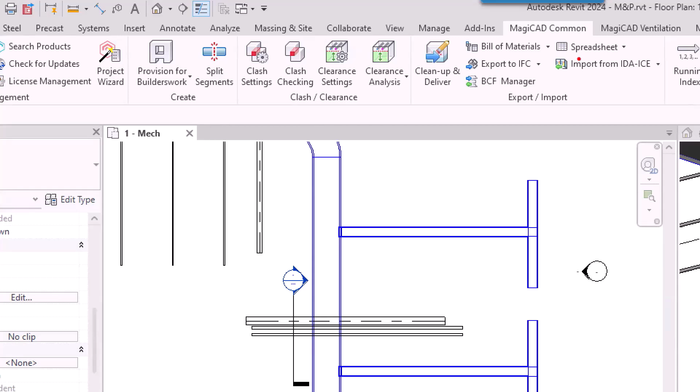Here you can find this kind of function from MagiCAD Common. You can find a lot of useful functions here, like provision for builderswork, clash checking, clearance analysis, and some kind of spreadsheet. A lot of useful functions here.

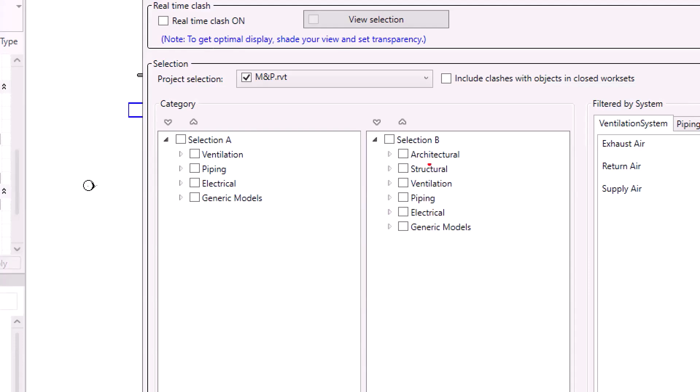For this function, I will go through clash setting, and I want to check clashes between different disciplines. On the left side is for the MEP disciplines, and on the right side is for MEP and architecture, structure, all disciplines. So I want to check clashes between ventilation, piping, and also between ventilation, piping, and electrical.

I want to make clashes, I want to check clashes between them. And here you can find we also support clashes between the current model and the linked model.

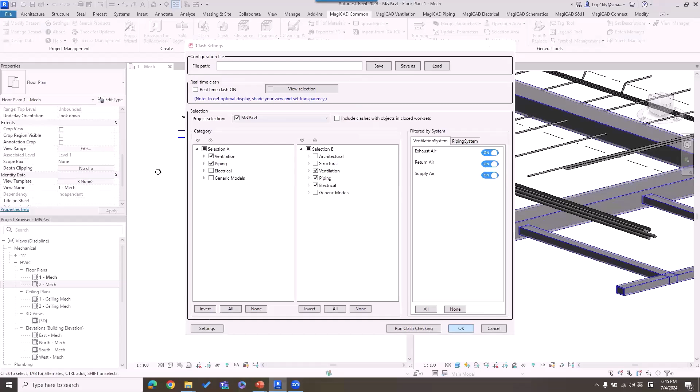Here I can do clash checking for the current view, to check clashes and get a report. With this report, you can do like this: check the 3D view for each clash.

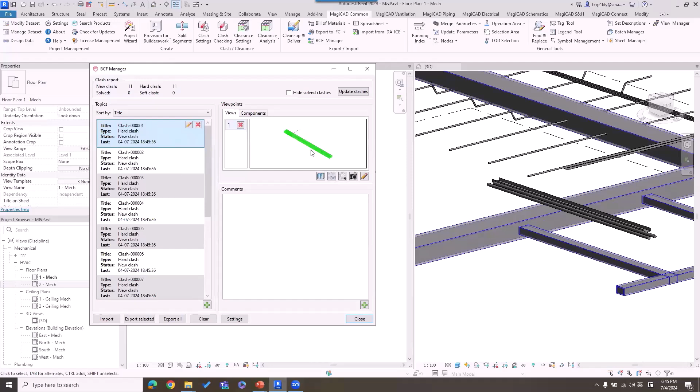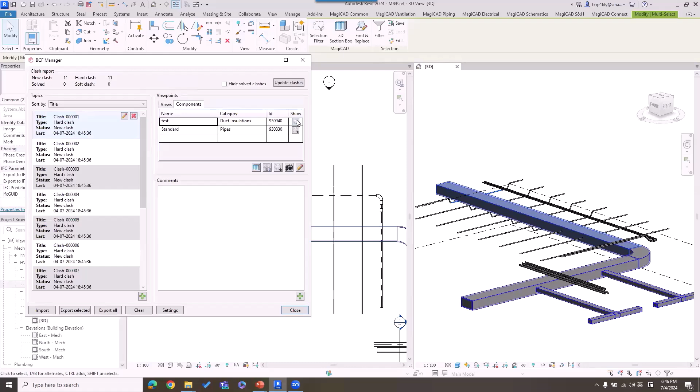Here we have this function to show the clash-related elements, and it will locate them in the current view, like this one, in the 3D view for example. I can also locate those certain elements like this, so that means you can find all of the clashes.

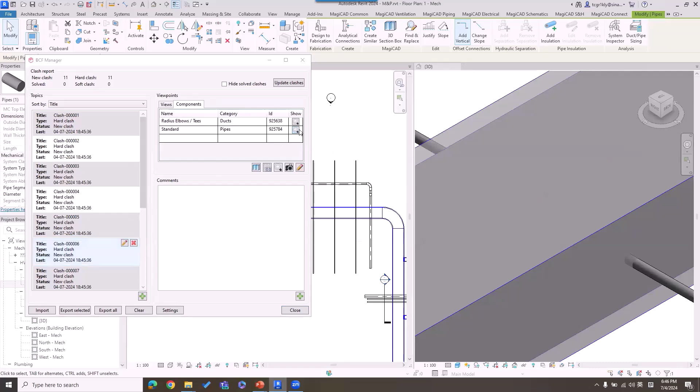Let me take some clashes here as an example. For example, this one: here is a clash, and I want to fix it. You do not need to close this dialog, you can just locate the certain elements in the current view, and then use our function like vertical crossing.

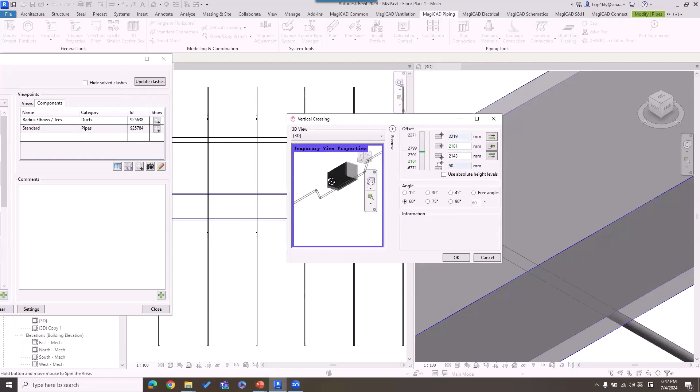Start from here to there, at the bottom of the reference one, make a crossing like this. Okay, and I fixed a crossing. After I click close, let's check what will happen to our clash report.

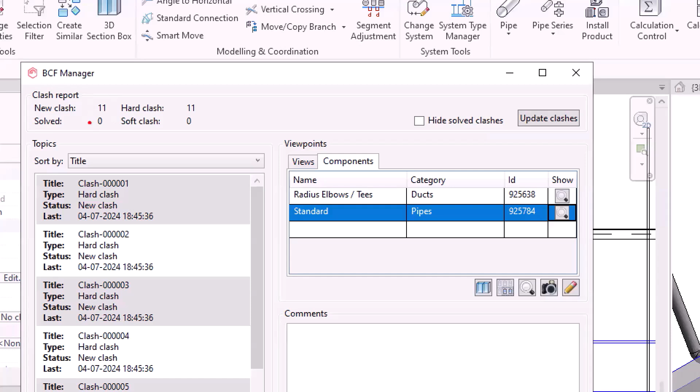At this moment there are 11 new clashes here, the new clash number is 11. Here we have the update clashes function; update, and check the result here. You'll notice I have solved 2.

So that means you can check clashes in your project, fix the clashes according to the report, and also update the report. So that is our clash report function.

For this clash report, we can also export to other formats, for example like a BCF format, to Excel file, to PDF, or printout. It's quite useful for your daily work because you almost can give up Navisworks.

Because in the traditional daily work with plain Revit, you always export the model to Navisworks and do a clash report there, then find the clash according to the element ID. But with MagiCAD you can just do as I showed. That is our clash report, clash checking function.

For the second one, provision for builderswork. In the real project we also have this kind of clashes between MEP elements and architecture elements. So here, if I draw something like this, like a wall,

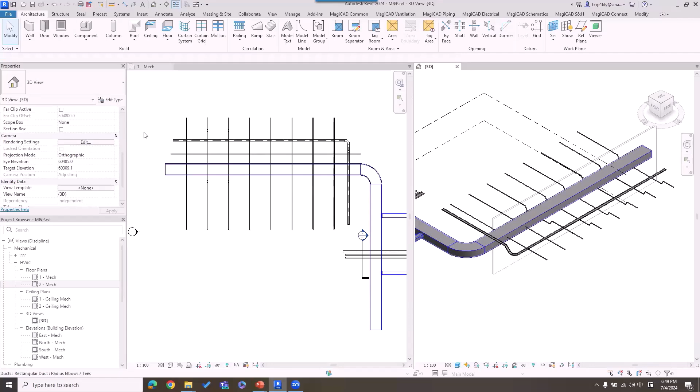a segment of wall here in this view, and change the 3D view to coordination, you can check: here we have some clashes between MEP elements and architecture elements.

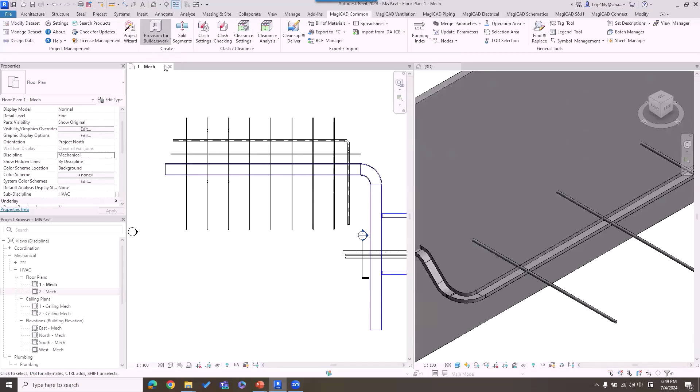So here we can do like this: provision for builderswork, automatic, and just create openings for the current view. Okay, and some openings will be created automatically, then wait for seconds.

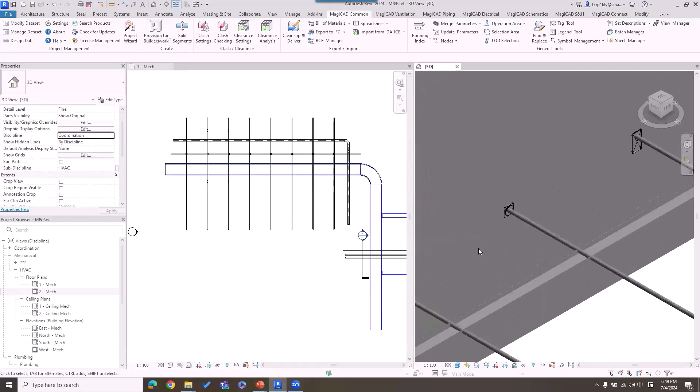Wait for seconds, and you will check the result in the 3D view like this. It's like a space holder because the current model is the MEP model.

In the traditional workflow, MEP engineers only have access to create openings just to create information, not to create a real opening on the wall. So this is just like a space holder.

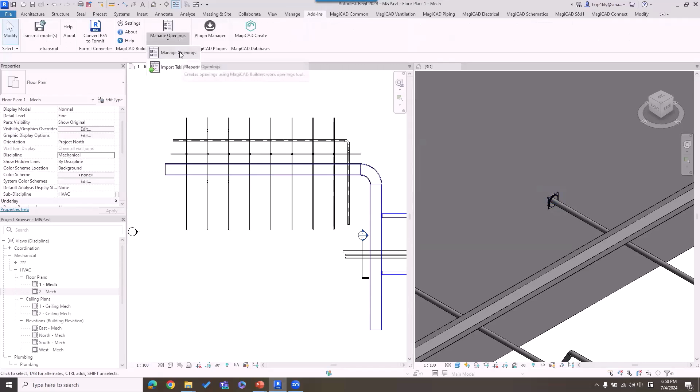We also provide another function here for the MagiCAD plugin: it's manage openings, used to create real openings on the wall by the architecture engineer. So that is our function of provision for builderswork.

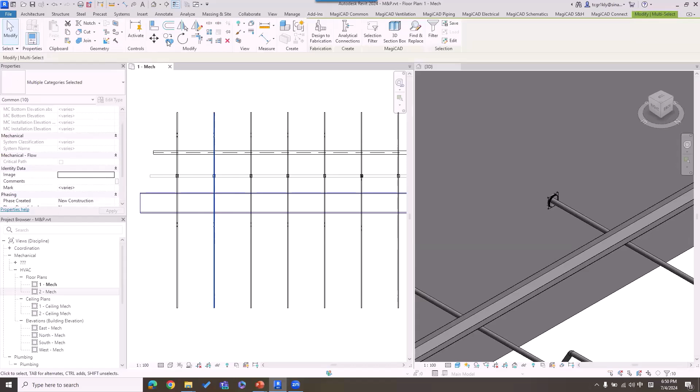And in the real project, you always make some changes after that. So here, what we can do is like this: for example, I move the pipe from here to there, do some changes, and check the 3D view.

And I use this one, I move this one from here to there, and if you check the 3D view, okay, the place of the pipe has already been changed.

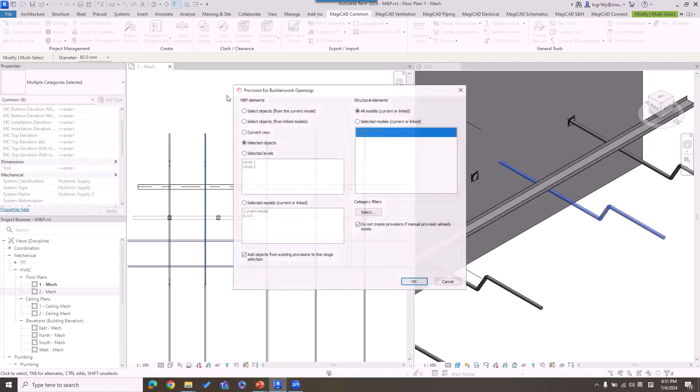And here I can use MagiCAD again and check the current view, and here you will notice one void, one opening needs to be updated. Click OK, and it will be updated automatically according to the change of the pipes or the ducts. So that is our provision for builderswork.

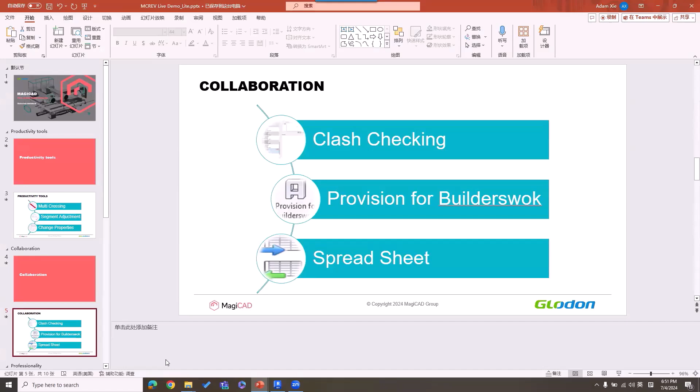Then the third one is about collaboration, about the spreadsheet. So here we have a function that's quite interesting: it's spreadsheet, used like an information synchronization function outside Revit.

For example, in your real project, if we talk about LOD, a lot of information is required as a result. But if you use plain Revit, you just select the element and input the value here, then select another element again and input the value there. So it's a nightmare for your daily work, right?

But with MagiCAD we provide a simple way: the spreadsheet. That means you can export all of the parameters to an Excel file, then type in values there, and we can input the values back. Let's take one parameter as an example.

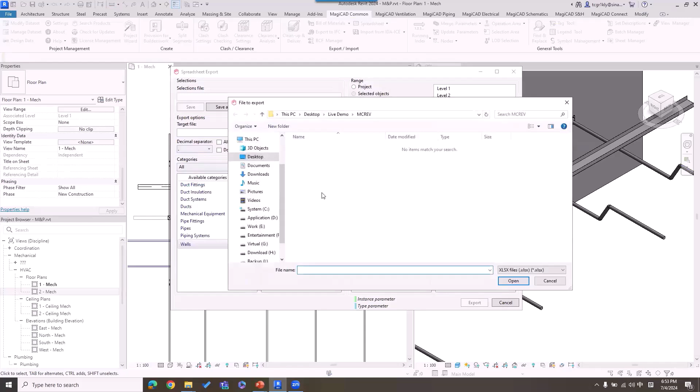For example, here is comments, it's empty at this moment, the value is empty. So I take this parameter as an example. I use this spreadsheet function, export, and find somewhere to save the spreadsheet.

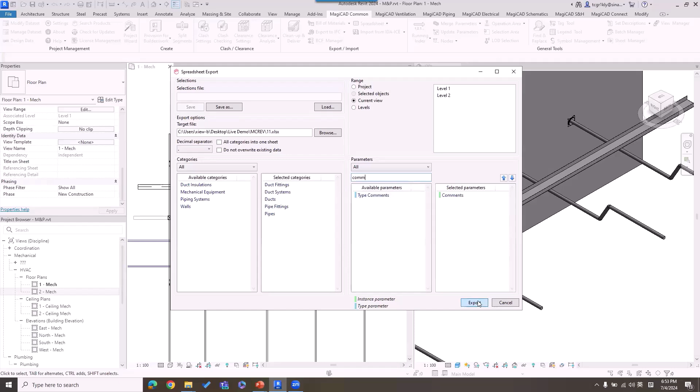And for some categories, find a certain parameter, comments, and export.

Then I will get this spreadsheet, it's an Excel file. I open it, then I can fill in those values here, like this one, just like a dropdown, like this one.

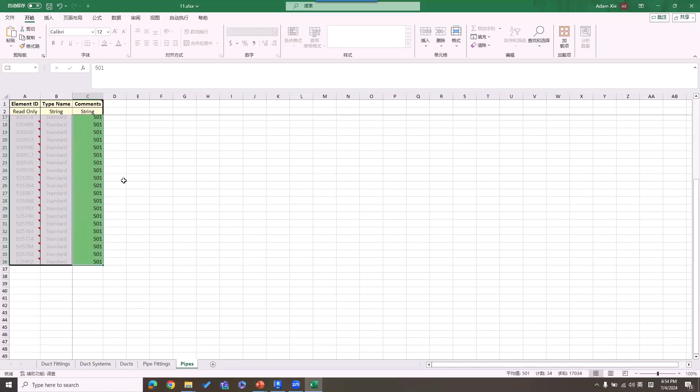I can just input some value here, okay for pipes, just input some value, and then save it.

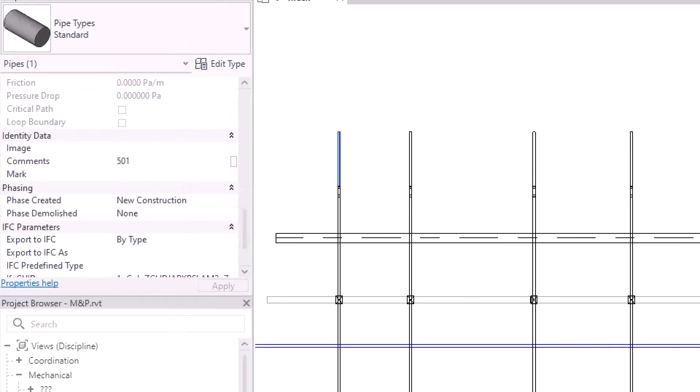And with MagiCAD we can import the file, some changes there, accept, and then check the result. Here, if you check the information here, here is the comments. That means I input or injected some value for the parameter outside Revit.

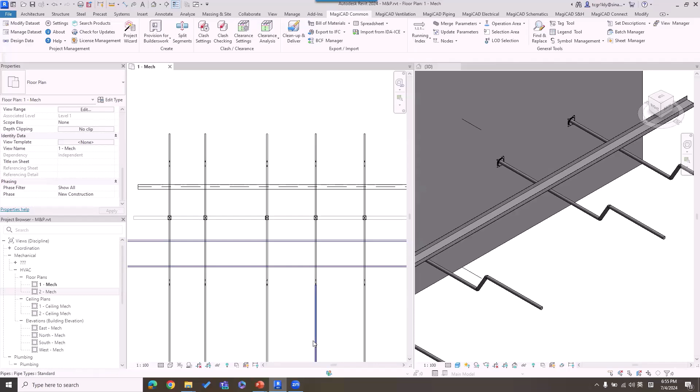So here you can find the different values. It's quite useful if you need to provide a Revit RVT file with a lot of information, so you can use this function to inject information outside Revit. So that is our spreadsheet function, and that is the second part of the live demo: collaboration.